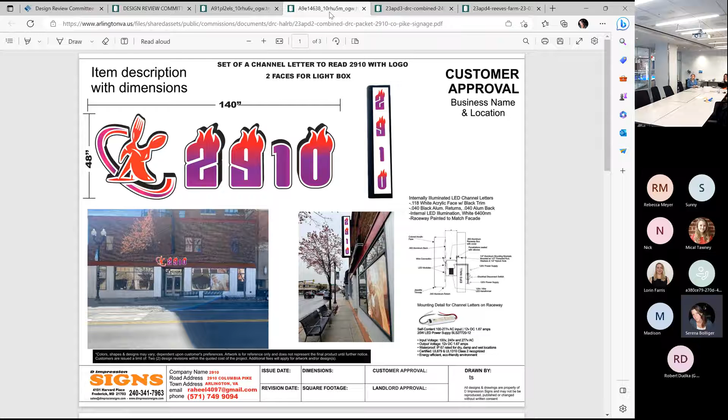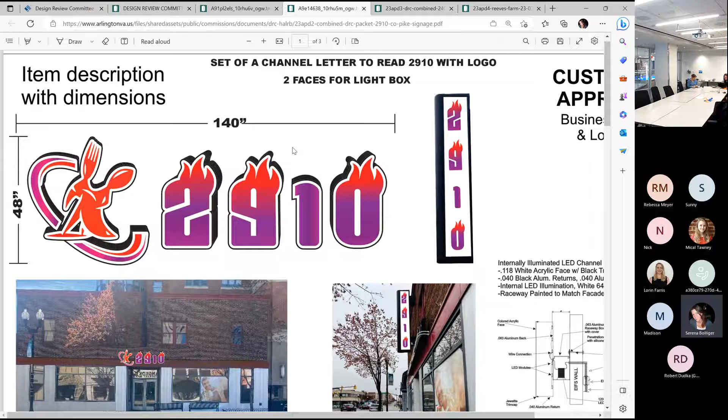The next item is an application from Mr. Khan at 2910 Columbia Pike. You reviewed his window application the last two months, and he is going to go ahead and do the windows as approved in that meeting. He has now returned for signage. He is planning to put in this blade sign and facade signage, and I included in the packet images showing that this building traditionally has a blade sign and this facade signage, and it had it also originally, back in the 90s.

So this is the design that has been submitted to us. Mr. Khan, are you on the line with us? Yes. Ah, perfect. Yes.

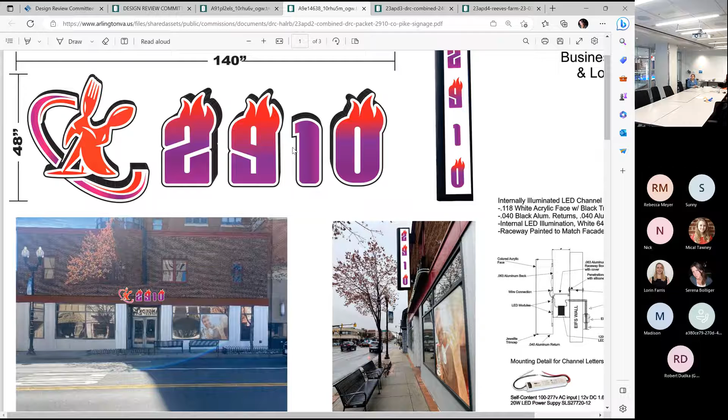Would you like to add anything? No, the only thing I wanted to add is that basically all we're doing is just changing the name that is currently there. We're not adding anything. The placement of the sign is exactly what it is currently there from the previous tenants. So basically we're just taking their sign off and putting ours in the same place. There's nothing additional that we're doing.

Any questions from the commissioners? Does anybody have comments? I have a few, but I'll wait. Well, I think we've gone over this quite a bit, except for the sign. I think it's certainly interesting. Not sure.

For 2910, the horizontal is quite readable despite the flames at the top of the numbers, but I'm not sure it reads as well on the vertical one. I mean, I can see the virtue of having it repeat, but it's not as legible.

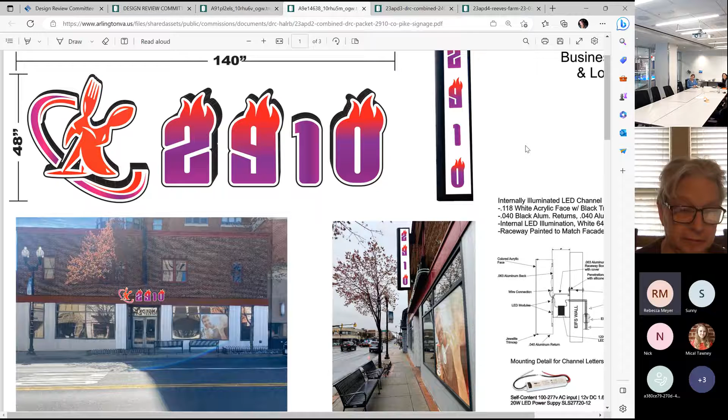Do we know, historically there's always been a linear sign. How was that anchored? I'm just wondering, because the current sign that's there now is much longer, and when we put the shorter one on, what will it look like behind it?

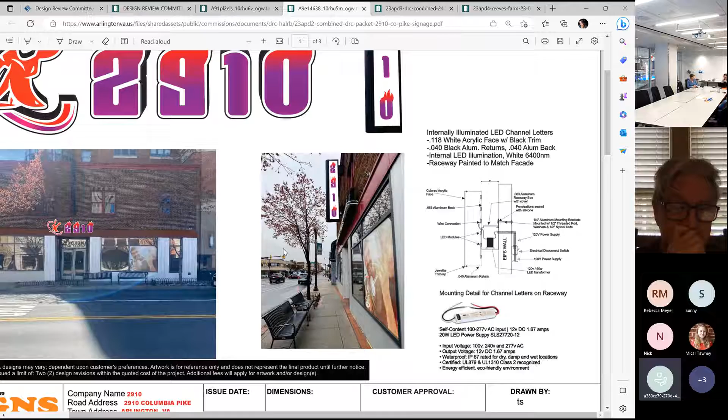Oh, I see what you mean. You're asking, since there's currently this black anchored sign, which is much longer, how much will need to be infilled, and what does the brick look like behind it?

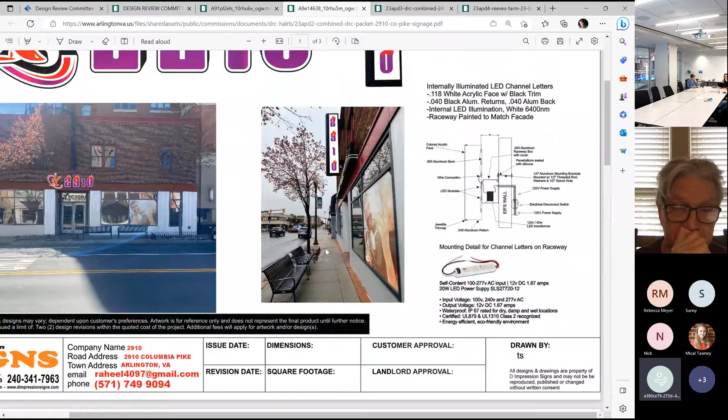Has the sign already come down, Mr. Khan? Apologize, can you repeat that again? Has the black sign that used to say P. Brennan's Irish Pub already come down? No, ma'am, we haven't touched anything yet.

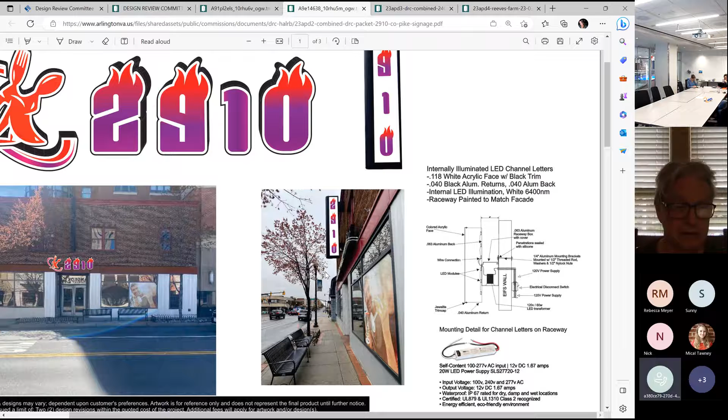Okay, so you don't know what it's going to look like behind when you take it down. You don't know how much anchoring there is or if there's going to be holes in the bricks or anything like that. So what we currently have there, the black sign that you're talking about, where it says P. Brennan's Irish Pub — I'm not talking about the vertical one, the blue one. We're talking about the horizontal one.

Yes, so that signage is pretty long, basically. So we have to actually see behind how much anchoring has been done. But my sign that I'm putting on there is much smaller, so space-wise, where we're going to put it is going to fit right into it. We're not adding additional holes to the facade, and we're not doing any extra anchoring. Whatever is already there is more than sufficient for us. Most likely, we're going to have to cover some of the holes that were put there by the Irish pub that was there before us.

Right. I guess that's my concern, is just knowing what's behind it when you remove that long sign to put on the shorter one. I'm not opposed either way, I just want to make sure that we're treating the facade appropriately once we see what's behind it.

Yes, ma'am. The only way I can do this, and the only way we can actually know, is if I take off the current sign that's already there, and I cannot touch that until I have some type of approval from you guys. So I can't just literally take off the current sign that's there. But what I do know is, when I spoke with the designer, the company that's designing the sign, is that the space that the current horizontal sign is literally a lot bigger.

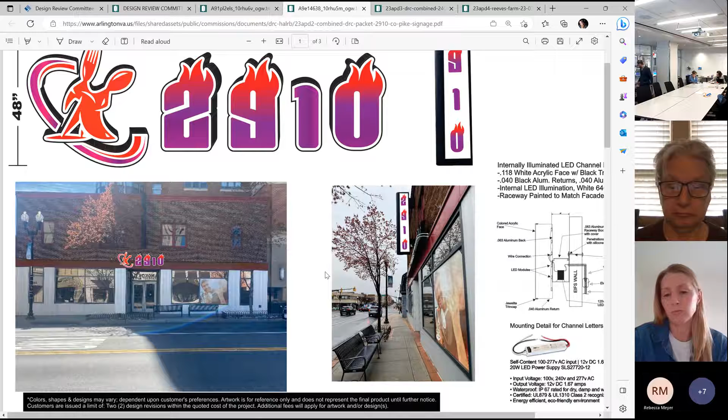Sorry, can you clarify? Maybe I'm misunderstanding. Serena, if you go to the straight-on photo of it, so you said that it's nailed to it. What is it nailed to? I guess because from your comment, it sounded like some of what is currently there is staying for your sign.

Is that correct? Okay, so the current sign that's already there, there's a lighting board on the bottom, and then they have letters on top of it, which are the neon letters. Those letters are held by a frame which is in the back of it where the light goes. So that frame in the back of the letters, you gotta have a support to hold that sign.

So they are anchored or nailed into the facade. So once we take those off, and I put my sign in the middle of it, we're using the same anchoring and location, basically in the middle. So whatever damage, or I wouldn't call it damage, but whatever holes are made on the left of it and on the right of it, those need to be filled in. And that wasn't done by, obviously I would go ahead and fix it, but that previous sign, the previous restaurant, it was approved by basically you guys.

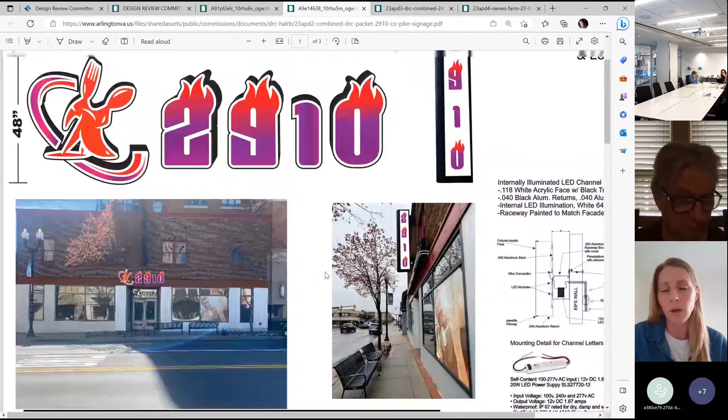Lauren, you want to? Hi everybody, Lauren Ferris. I just wanted to kind of reiterate, whenever we are dealing with signs, as Robert was saying, we would just, and it sounds like Mr. Khan is saying that once that existing sign is taken off, if existing holes or punctures can be used for the new sign, so that we're not putting any more new holes into the facade, and that repairs would be done.

And Mr. Khan, if you need to do any cleaning of the facade because it has kind of like a shadow left on the brick from the old sign, just get in contact with us and we can tell you how, because we don't want to do any power washing onto the brick.

It would totally be understood that, man. Believe me, I've been—this is probably my third time coming back, and I learned so much about this whole dealing with historical locations and properties. So I will let you guys know if anything needs to be done.

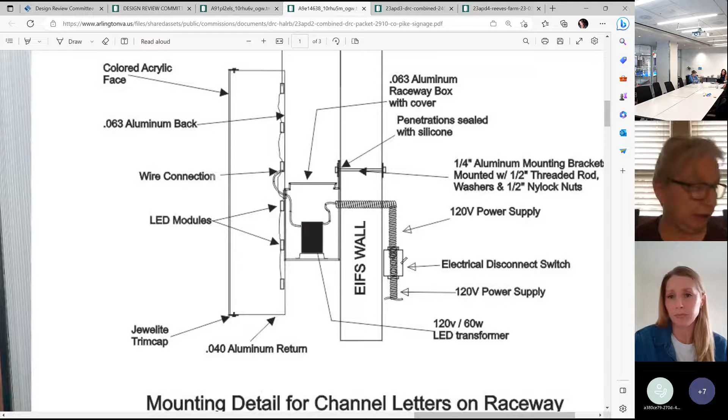Anybody else have any comments? I just have one question: is the vertical sign, the blade sign, the same height as the existing sign, or is it shorter or taller?

No, the vertical sign, all the hardware is gonna stay exactly the size it currently is. All I'm doing is changing the plexiglass, because both sides have a plexiglass with the name from the Irish pub. So that plexiglass is the only thing that's gonna be changed. All the hardware stays exactly as is. Okay, thank you, it's good to know.

Andy, do you have any comments about this? Or did you already say something? I think... other than what I said.

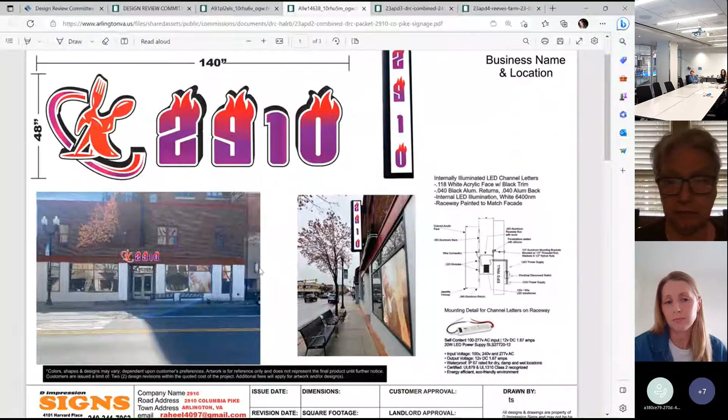I'm not sure the vertical sign letters are really that legible, especially the 2 and the 9. It's fine horizontally, but vertically I find it difficult, not extremely difficult, but difficult. I would have expected, if you wanted to put a number, to make the numbers a little more traditional, without catching fire on top. That's just my comment.

So the name of the restaurant is 2910, I gather. Yes, that is the name. Okay, well my comment is that if you look at the Irish pub sign versus the original Arlington hardware sign...

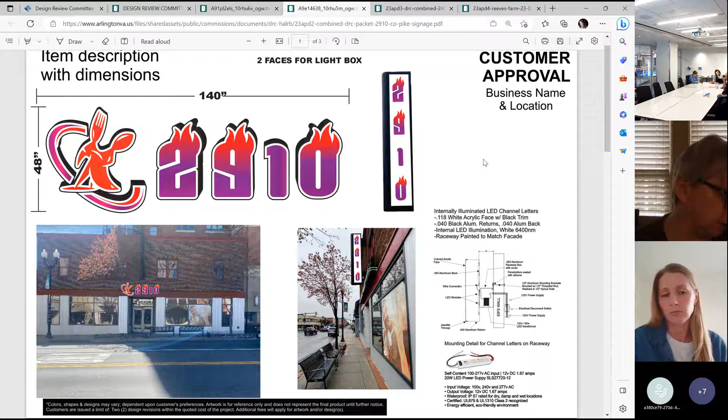They're actually both, the bottom horizontal part is not identical, but it's similar in that you have a long linear sign where the letters sit on that shelf you alluded to earlier, with those little verticals in the middle that give it the center where the blade sign goes up. Whereas yours, your horizontal sign is just a conventional sign. The shelf has disappeared, it's much shorter. It doesn't have any kind of long linear element to it, and it disturbs me because it doesn't have any of the character of the original sign.

Whereas the Irish pub, it's a modern building, they used a modern font. I understand some of this is your logo for the thing, but I feel there should be some effort to make an accommodation with your sign to the historic character. Let me finish. The historic character of the signage, because this is a really simple building and quite a lot of its character is actually the sign, quite frankly. And whereas I think the Irish pub one carried the spirit of the sign that was there before, I don't think yours does. It's completely different. It looks like a sign that could be anywhere, that doesn't have to be on this historic building.

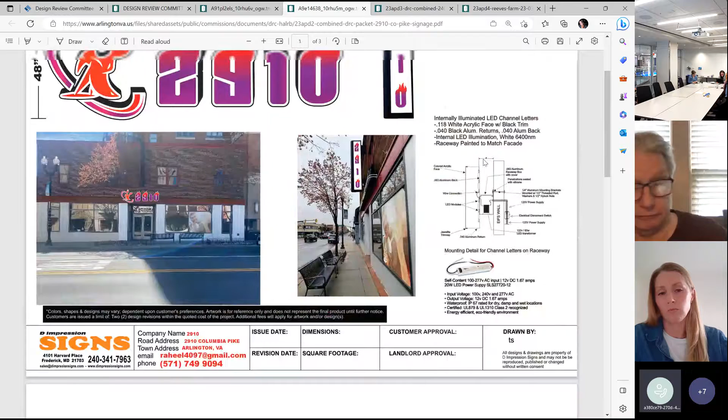Okay, as far as the font goes, Robert, we can change that, that's not a big deal at all. The font could be changed. This sign is not made yet, because again we're just waiting for the meeting and the final approval from you guys before they start producing anything. Okay, the font could be changed.

And can you look at something that's more, even if it's just lines that come out from the 2910 in both directions, give it some length? I know you were in the middle of the meeting, I don't even know if I can send you guys something. There's another logo designed by my designer which I was looking into, because I had a feeling this comment was gonna come up. So I had a logo designed which I honestly like a lot better than this current one. So I don't know, is there any way I can show it to you guys, or email it to you guys, or somehow get it over to you guys?

So you have a week from now to send me any updated drawings, and they could be considered afresh at the HALRB's meeting. So we can do that.

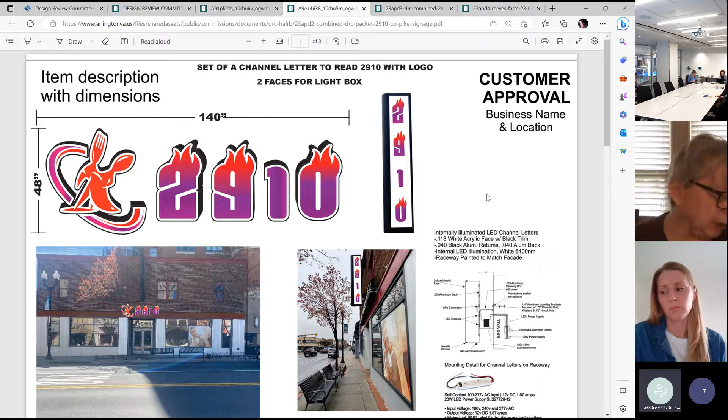And my other comment before we leave this is that you also notice the prevailing theme of both of the other two signs had a black and white sort of scheme, so you might want to think about that as well, that maybe instead of, particularly on the vertical sign, doing the letters on white, you do them on a black background. It was going to be a black background. We're going to keep it the same as we were talking about for the vertical, right? Yes, because I think with something that's black, you can still have elements of color in it, but where the predominant feel is more black and white than purple and red.

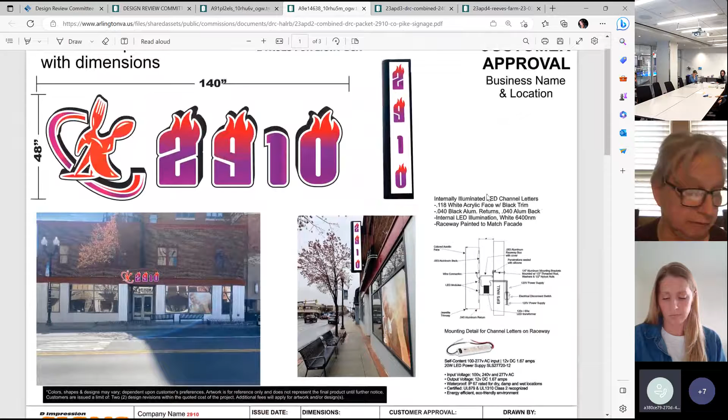So those are my comments. But I do have one thing that I would like to say: the name of the restaurant is just numbers. That's the only thing, there is no such thing as a pub or a bistro or a kitchen and bar or restaurant.

But what I can do is definitely the other design that I have is much more cleaner. Font is really good, and there's some additional lines that make the sign a lot longer. Yeah, so it's just different.

Yeah, no, I think you can do it with lines. You don't have to do it with words. But it's just something that extends it so it's more horizontal. Yes, definitely, yes. Okay, great.

Okay, Robert, can I ask for a clarifying question on the direction that you're giving? I just want to make sure, are you all trying to see if Mr. Khan can keep on the horizontal line, keep that kind of Art Deco line design that the old sign is sitting on? I just want to make sure, because right now I'm not hearing that that's something you want to see.

I personally like the idea of the shelf with the numbers on top of it. If there's any way you can incorporate that, maybe even keep the bottom part from the Brennan's Irish Pub and just put your, replace the... There's one.

So the reason we had that black board removed, because first of all it's extremely old, the hardware, and I wanted it to be removed. So we had the sign pushed down because we're still meeting the minimum requirement of the height where the sign can go. And if we push that down a little bit, that way we can have the logo and the numbers and everything could be a little bit bigger than 24 inches.

Okay, well, why don't you show us what your other option is, and we can react to that, and maybe we'll revisit this idea of the shelf then. Yes, okay, thank you. Okay, no problem, I'll get that over to you guys.

Okay, so can I confirm we're putting that on the discussion agenda for the HALRB? Yeah, if they want to do it this month, I guess so, yes. Okay, oh yes, I'll get it over to you guys, and if you guys can put me back, or I think Serena was saying the next one is on the 15th or sometime.

I gotta check the email. Yeah, when is it? The 19th? Yes, so 2 Wednesdays from now. 2 Wednesdays, okay, so the 19th is perfect.

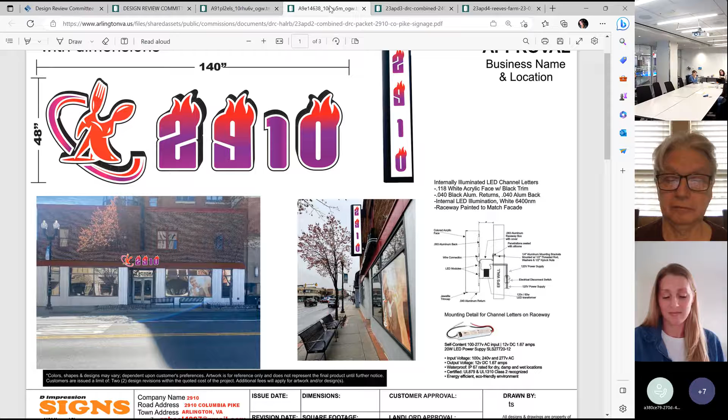Okay, so agenda item number 3. This is for another sign going into the space next to the Rappahannock Coffee space. And so this is the existing building, and here we have the sign that has been submitted. Mr. Kataria? Yes, I'm here. Perfect, nice to meet you.

So the applicant has already reduced the size of the sign for us and has resubmitted this. It used to go up into the coping, and he's been kind enough to edit it. Do you have any additional comments to make, Mr. Kataria?

Yeah, so one of the things we were kind of looking at again was if you look at the Rappahannock sign, or the sign that existed before this, I don't know if you have access to that. I can pull it up. That's fine. So that definitely goes above that green or dark gray line I know we talked about. So, and then I started looking into it. I was hearing that only the first, like, top 2 lines you should not cover, but the third line is okay. So can you elaborate on that if you have information?

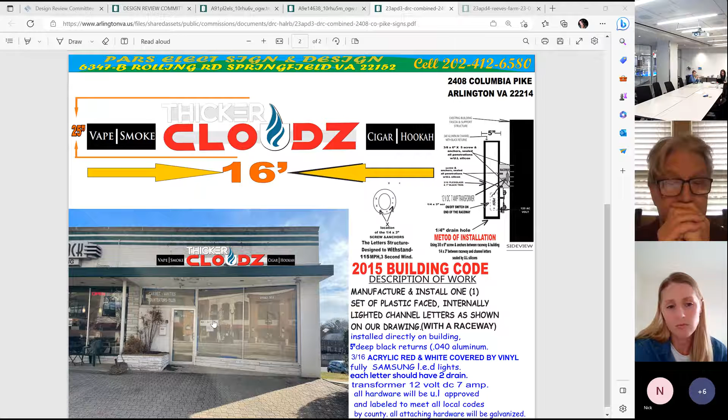What does everybody else think? I agree with you. I think the sign needs to be raised so that the smoke coming out goes up as the Rappahannock does, and cuts the lower two letters. That'll make it much more visible, because that overhang does come out a ways.

It does obscure the sign as it is now, you're right. It's not going to look like that unless you move it up. It really needs to move up a lot more. Otherwise, you'd probably see it from the street, but you wouldn't see it from street level on that side of the street.

So I don't have a real problem with it. I think the comment about echoing the green instead of black is a good point. I think it would help it blend in a lot more.

The only question I had was, I guess, will the vape smoke and cigar hookah text be readable from the sidewalk? It seems a little bit small compared to everything else, and that text seems a little bit small and kind of scrunched down. I understand you don't want to make it too large, but maybe it's a little bit too small potentially. That's my only comment there.

But Mari, I think it's actually bigger than the thing that says coffee and roasting on Rappahannock's side. We put them, I don't think it's too small. It's just, I don't know, it's about the same as the coffee and roasting. I think you'll be able to see it.

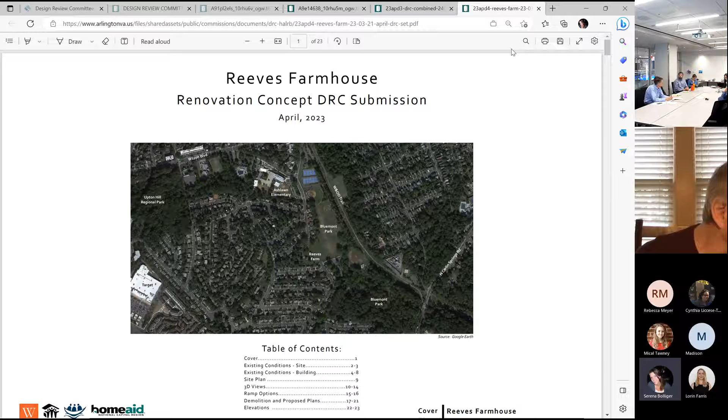Unfortunately, Kumar, you get the benefit of not seeing it on your screen. Yeah, the rendition of the package is not as good.

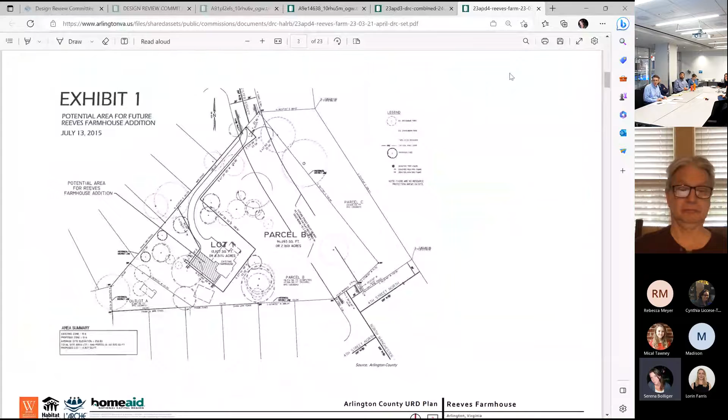So sorry, Serena, if you can, sheets 1 through 12 are no different. They just remain in the package for the full board when we get it. So if you jump to 13, please. And we always have these if we want to circle back.

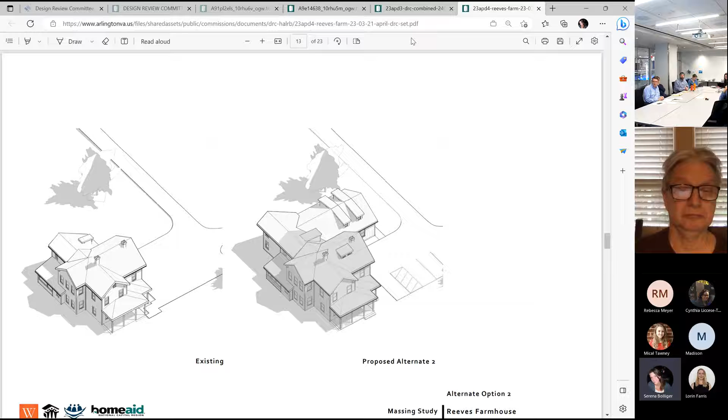So just to recap from last time, we presented 3 options: one we called baseline, and then alternate 1 and alternate 2. Alternate 2 was favored by the committee last time, and we've been proceeding to update that somewhat. In this aerial massing view, the primary difference you'll note is that we've added dormers to the addition to give it a little more texture, as was suggested.

We did look at trying to do a porch on the entry side. It's just not enough real estate there to do that, we felt, and also the fact that just behind that one window you see in the addition are bedrooms, so that's a private area on the inside as well. We didn't think it would be good to have something that was, for lack of a better term, an attractive nuisance, having people want to occupy that space directly adjacent to a bedroom.

But we did add dormers to give it a little more texture. That attic space, as we developed more detail in the interior layout of the second floor in the addition, we think will be a wonderful storage attic for operations, and we think we can get access from the second floor into that. Those aren't fake dormers; they'll be real dormers with real windows to get some light in. At least that's our intent.

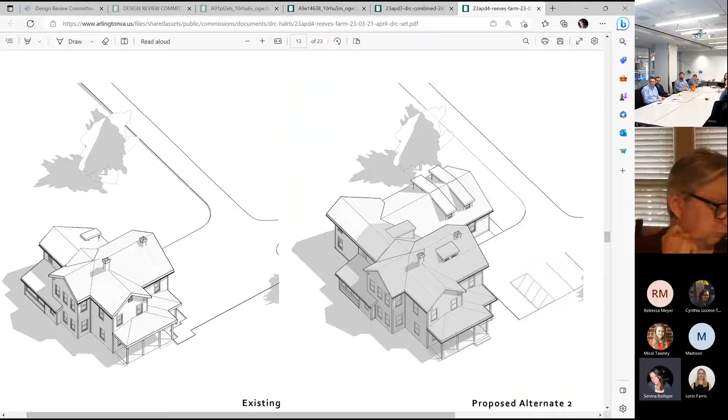So the next sheet is the down-on-the-ground massing studies. Again, lower right, you can see the same, you're seeing the dormers there. And just a reminder, we're still in a concept phase here. We haven't begun permit or construction drawings, so there will be more specific detail as we progress.

Hopefully, if we can get to the full board this month and get this concept approval, then we're going to race right into that, because based on that we want to get it done as quickly as possible.

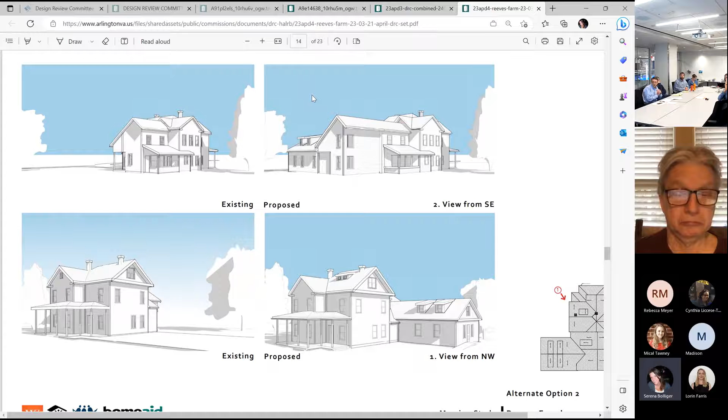The other thing I'll note on the lower right, compared to previously, is that we raised the eave of the addition up. I think previously we had the eave aligning with that intersection right at that inner corner, and we found, as we studied more, there just wasn't enough headroom in the addition. So we raised that up. We actually think that disjoining those helps a little, creating some distinction between the existing and the new. Subtle thing, but we think that's good.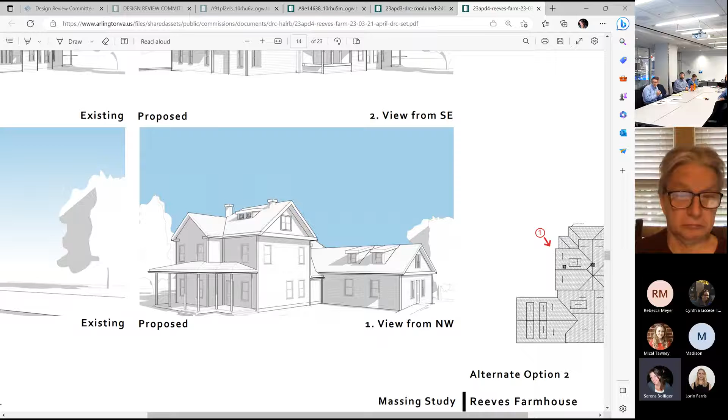We're going to show you some ramp studies that were asked for last time. That's not represented here; we're going to see that in a different view. Could we see the southeast? Sure.

So what I'll note on this, again you're seeing the dormers on the addition to the far left. What was talked about and suggested last time was trying to introduce some more prominent distinction between the addition and the original. We did study that, and we did not incorporate it.

Primarily because in order to introduce a massing change, you would basically have to drop the ridge line down, drop that whole roof structure down, which presents headroom problems on the interior. And when we studied that, from a purely visual standpoint, we didn't like it much, because you've got that gable sort of to nowhere on the taller farmhouse, then the original tenant house which drops down from that, and then if we bring our new addition and drop down again, you have this cascading effect, which we studied briefly but just didn't like visually.

We think that with this continuity of the roof line, we certainly have a corner there, an outside corner, and then we have a setback, because that's part of the URD requirement, setback 2 feet from that existing corner. So we do have a mass change in that plane, and we're hoping that this solution would be acceptable.

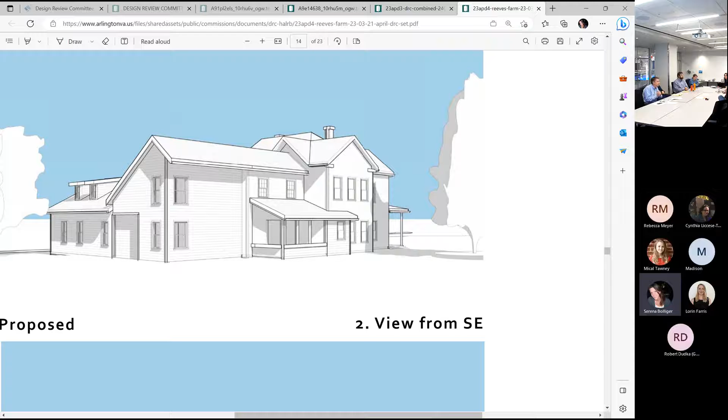Serena, if you could flip to the page, I think those are the highlights from that—these images. And then, sorry, if you go to the next one please, page 15.

These are the ramp studies. Originally we had a ramp running along the front of the porch, and the comment was that it's a visual obstruction to the nice porch as seen from a distance, and to the views out from the porch—there's also potential visual obstruction. So we have two studies here, both of which address that concern in slightly different ways.

This one—you're not seeing the context, but you can kind of see it in the upper right image—shows the parking is directly adjacent, with a couple of handicap spaces there. So this one brings you up and around with a switchback, coming in centered on that column bay of the porch at the left.

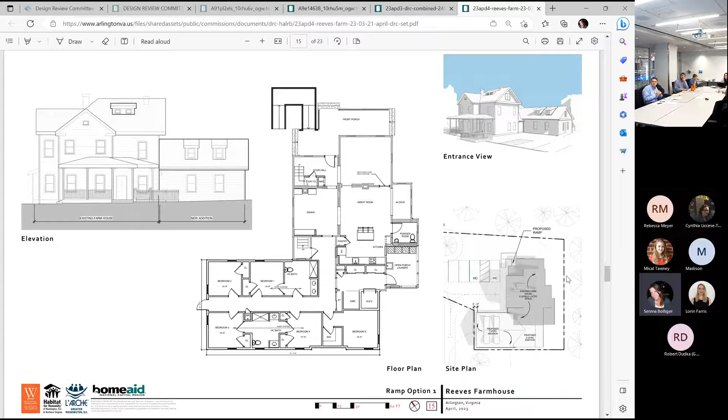The primary distinction with this compared to the other one is that it keeps those couple of risers on the left from grade clear. It maintains all three existing stairs up from grade—one on the far right, one above, and one on the far left—keeping those all intact. So it comes into the porch at a spot that doesn't disrupt the existing circulation path out to grade.

What's your height on the handrails on the porch? They'll probably be 30—well, it could be 36, or they may be 42. So it would be one of the two. I mean, residential construction code allows 36.

I'm wondering if you can't drop it more—drop it at least to the height of the window sills. That may be possible. I think you could go to 32 inches or whatever. Yeah, I don't think that's necessarily bad.

The guards between the posts, we don't think are actually required by code because the porch isn't that high. It was a desire on the operations side to keep residents from falling off. So from that perspective, study that and see if that alignment provides enough protection. The lower you make it, the easier it's going to be for somebody in a wheelchair to look over it, because you're looking down to the valley, not straight out.

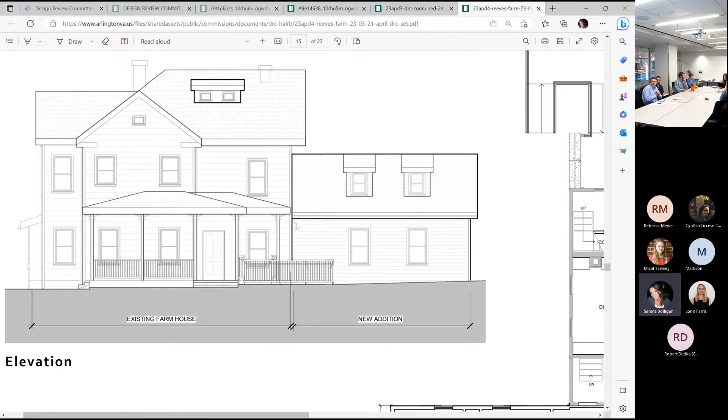You can sort of see it—sorry, it's a little thumbnail on the bottom right—but you're seeing that access in relation to the parking. There was always planned to be a sidewalk along that edge of the parking that comes down and allows for access to the porch, whether it was the ramp in the front or some other configuration.

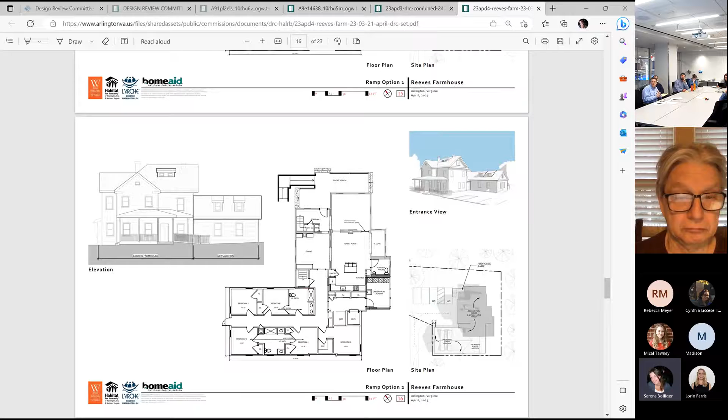So if you go to the next page, please. The second option was an option that somewhat minimizes, it does the same thing, it keeps the top stair and the left side stair access to grade intact. Still comes in the center of a post bay on the porch. But it's an L, obviously, compared to a U. It brings the access point down closer to where the parking access is, which I think ownership prefers.

The downside is that it obscures or kind of blocks that stair to grade on the right. We think it's somewhat less visually prominent from the park side, which was a comment we got. But it has the downside of kind of obscuring that stair.

Can I ask a question? Did you look at a ramp that basically comes up the side of the building? It would require extending the porch platform, the two steps on the side, out to receive the ramp, but just keeping the ramp all the way against the side of the building, so that other than extending where those two steps go up, you're pretty much not doing anything at all to the porch.

We considered it. We didn't draw it, but in our consideration of that, we felt it put the access point to the ramp too far away from the handicap parking, because you would be able to park, and then you'd have to circulate through the drive aisle aspect of the parking to get to access the ramp, because you'd need to effectively terminate it at the edge of the house before you get to the ramp platform.

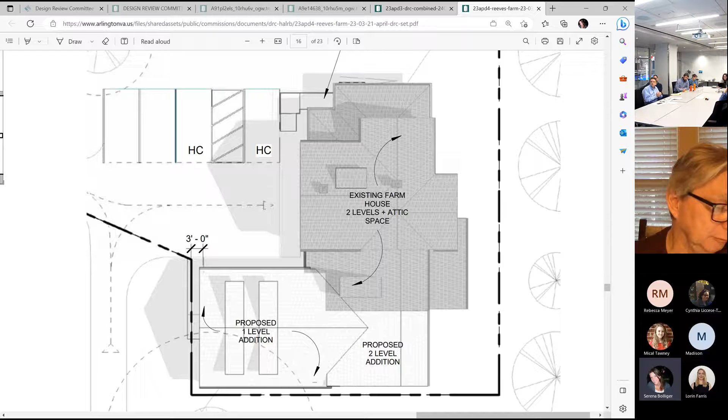Particularly if you're going to have guardrail elements, because I'm not sure I understand again why the guardrail elements are needed. What is the maximum, about 15 inches, from change of grade? It's really not very substantial. I mean, it's nowhere near what's required by code.

I can speak to that. It's really hard in a wheelchair to know that you're not going to fall off the end of something. So we have residents who will know to put their brakes on, and there'll be residents who maybe take their brakes off because they want to go and look at the edge of what's going on down in the park. And then the next thing you know, they've fallen off the edge. Okay, I understand. Well, that's all the more reason why I'm wondering about putting it on the edge of the building.

But in the grand scale of things, I think this is an important element. But I think between your two options and that option, we can work something out, I'm sure. So I don't know what everybody else on the DRC thinks about this. Please weigh in.

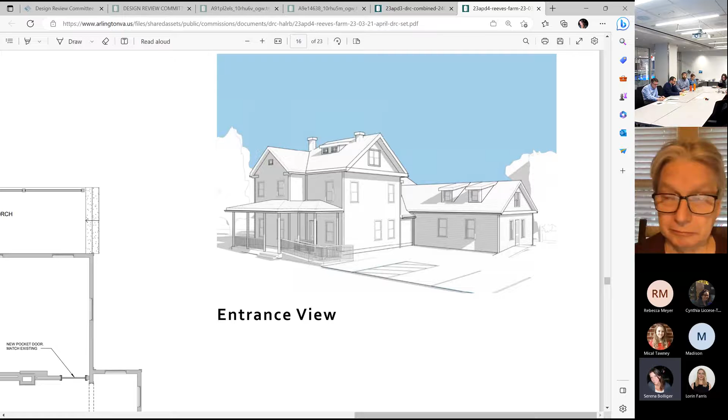I realize it's not as functional from an operational standpoint, but I kind of like the U idea, only because the U sort of gives the person descending in a wheelchair a nice park view as they leave the property. It's kind of like a nice little overlook area in a way. Maybe somebody not in a wheelchair may want to go up there and do a little overlook as well. I like that. I prefer that one just for that reason. It is more prominent, I realize that, but I like that functionality and aesthetics about it. But that's not a deal breaker, it's kind of my preference.

Anybody else, Andy? Well, the other thing I have a problem with is the dormer around the old addition on the side of the house. Can you put that dormer on the other side? Wait, Andy, let's just deal with the ramp right now. Let's just finish with the ramp.

So, have we heard from Rebecca on this? Not yet. The ramp doesn't bother me. I understand why it's shown the way it is. But aesthetically, I'm okay with it.

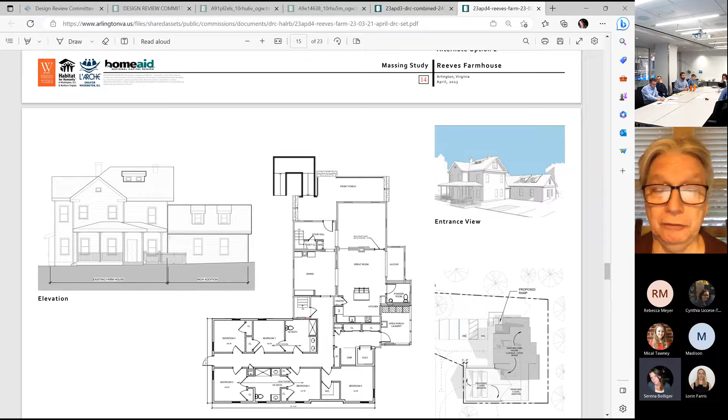It seems to me that the U-shaped one, as Omari was saying, gives you the opportunity to take a breather. You can rest at the rail there and look at the park. So it actually gives a reason why it's not a bad thing to do. The other one, although it may be a little shorter, really kind of bothers me the way it obscures the steps.

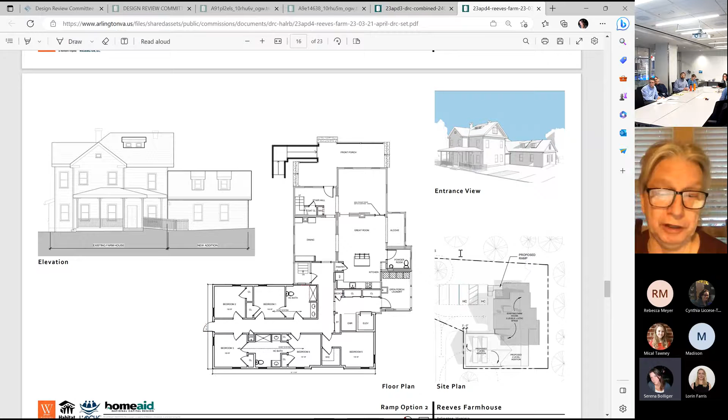I would worry that somebody coming down the steps might stumble, or if somebody wants to do the steps with a cane, it's going to make it difficult for them to maneuver between the ramp and the corner of the building. Whereas the other option leaves the steps open and free and clear if you want to use them.

And presumably there would be some sort of handrail that would assist somebody who wanted to navigate it. How many risers is that? Four risers, three risers.

I also dealt with a relative who had an artificial leg, and she insisted on doing the steps herself without a wheelchair, walking up. So I think for a lot of people, having that free and clear would be valuable.

If we're not going to consider the one along the side of the building, I'm with Omari in that I prefer the U-shaped one, even though it's a little more cumbersome and bigger relative to the porch. I think it offers its own benefits, as Omari was saying. It almost gives you a place to stop and look at the park, which is an incredibly beautiful view that everybody should benefit from. That's one of the beauties of this building — all these residents are going to have this incredible front yard.

Can I ask, will it be made out of wood or metal? It's probably wood, though the floor is probably something more durable. We're not talking about pressure-treated planks here — it needs a better floor, but the railings would likely be wood similar to the rest. So it's not poured concrete? It could be changed if it didn't suit their needs — the floor may end up being poured concrete. We haven't gotten into that level of detail yet, but we need something that's durable.

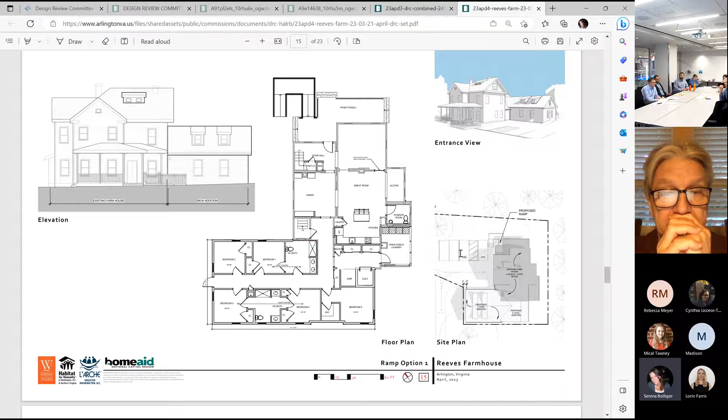Could I jump in? I guess what you're doing with the U-shaped ramp is making the ramp the furthest projecting element, and the house is basically viewed from a much lower elevation, so the ramp becomes much more prominent than the front porch. I object to it — I think the L-shaped one is the best solution, because this will be viewed from below, and that ramp projects out further than the porch. The porch was the most visible portion you see from below, from the park area up the hill. That's just my comment.

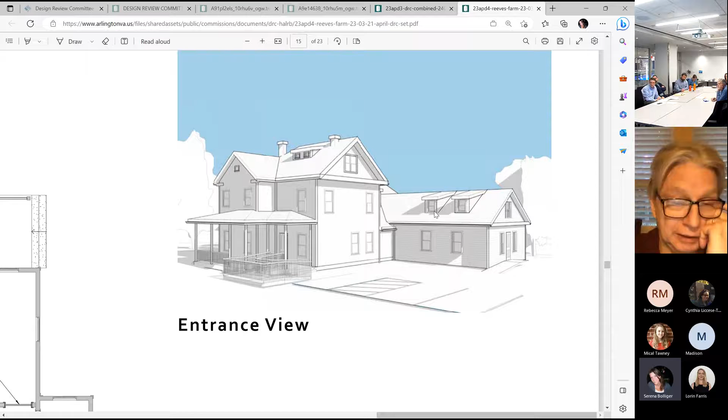I think that's a good comment, Andy, which is why I wouldn't dismiss the ramp up the side of the building, because even the L-shaped one presents something of that aspect. But you're right, you're going to see this, particularly if it has the guardrail, which I understand. So since this is the major part of it, I think you've heard our comments — maybe you can come back to us with something next time. Let's move on, since we're not going to settle this right now.

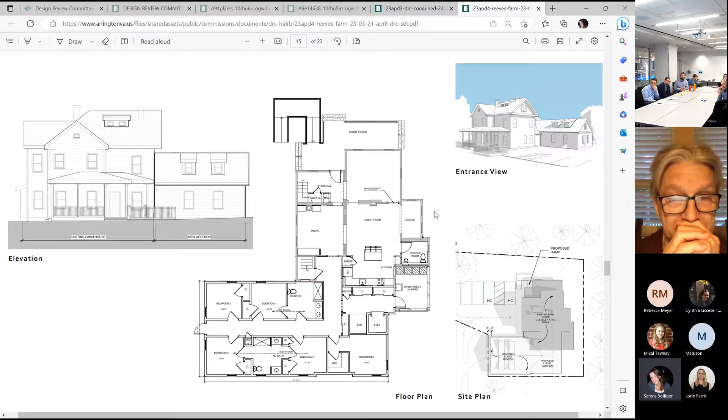Can we ask one more question? I guess what I'm wondering — I can appreciate that you get a view of the dormer on the original L addition to the house, but that dormer, because it's higher visually and larger, makes the focus go onto the roof instead of the gable front of the farmhouse. I would rather see the dormer on the other side of the roof ridge, where it doesn't compete with the original farmhouse gable. That's just my observation.

The rest of the dormers on the new building are perfectly fine, that's way back on the hill. You're talking about the dormer on the front of the farmhouse, this one. Yeah, it doesn't work on the other side.

Wasn't that required for head height as you came up the stairs? Yes, the whole purpose of that dormer is because we're introducing a new stair up to the attic, and that's the only way to get headroom there. The position of that stair only works that way, so it's not intended for the view.

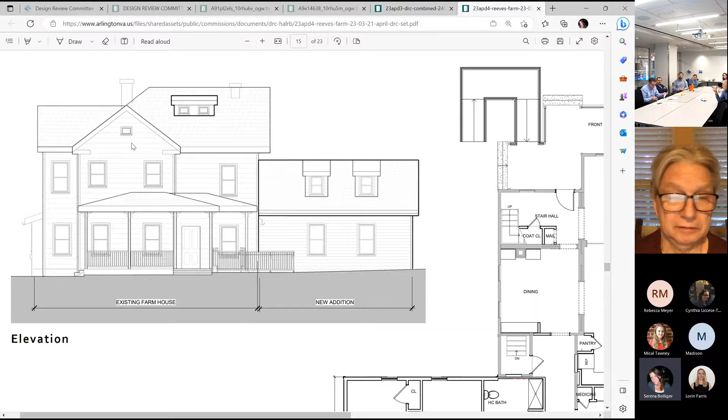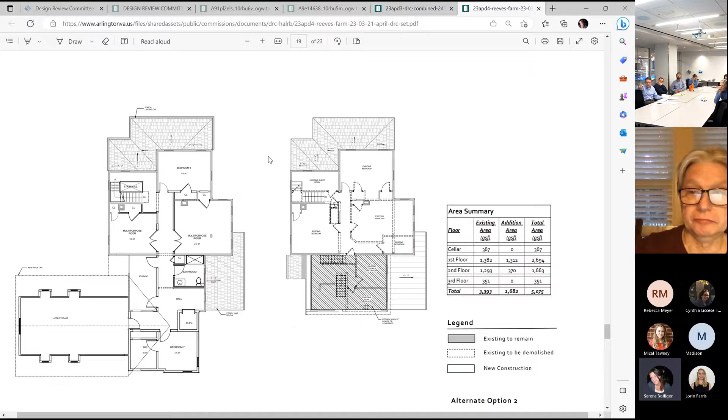Is that on a landing? No, if you go to sheet 19 to 20 - on the left is the proposed plan showing a new stair that stacks over the existing stair hall, creating that new stair from the second floor up to the attic. On the next sheet, you can see where that lands in the attic. That dashed rectangle, a little faint but you can kind of see it, is where the dormer is because that's where we need the headroom at the top of the stair.

So in order to get a stair on the back side of the ridge, there's nowhere to start it on the second floor.

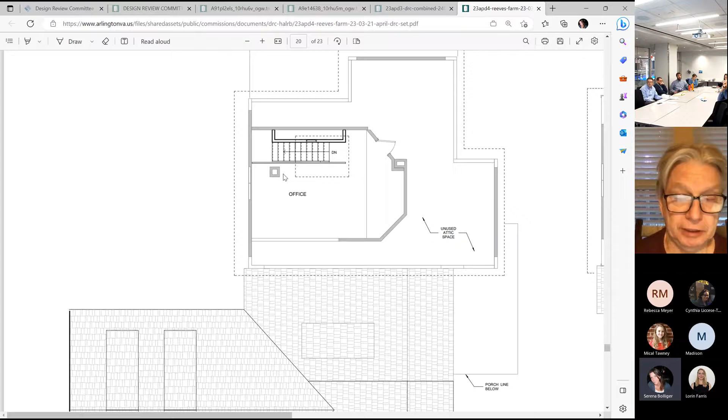Andy, I think one of the reasons we went with the shed was because we felt it was less conspicuous than a gable, which I think would be even more visually distracting, to your comment. That's why we were looking at doing it as a shed the last time we talked about this. There are probably ways that with how it's painted, it would kind of fade into the roof more. I'm sure there are ways to make it less prominent. I don't think it's hugely distracting right now, but I think it could even merge into the roof more.

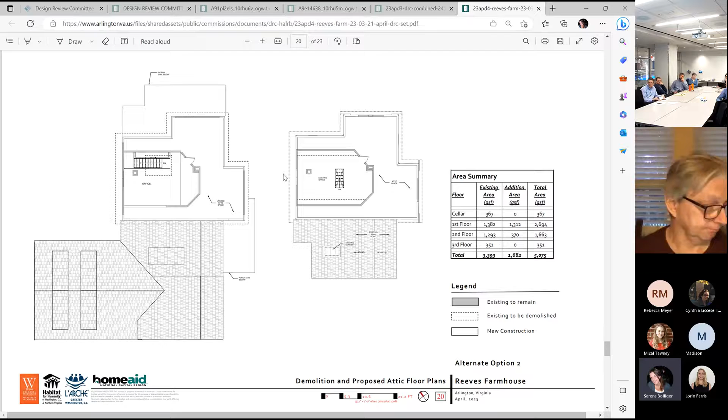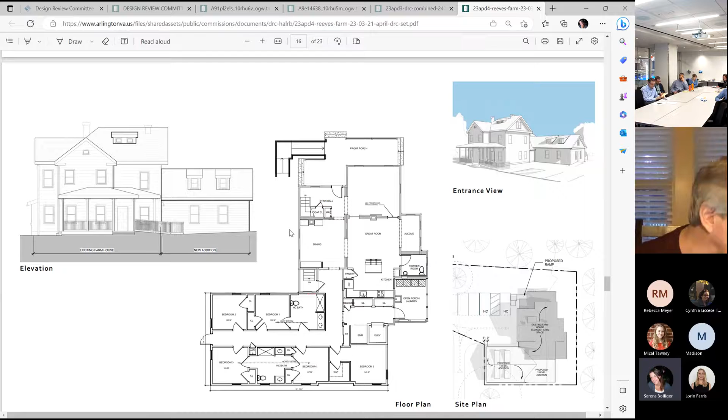Robert, did you want to talk about the addition now? Yeah, I agree that raising the eave is a good idea. I think breaking that from the adjacent roof instead of just having it extrude around is good. I still feel like it needs a little bit more articulation - I'm not sure exactly what.

The reason we had suggested the porch last time - is that an egress, that door, like a fire egress at the end? Yes, it is. So that's why you don't build there - there's very minimal space from that face of the building to the property line, it's right at 3 feet. So we can't really build an additional structure there, right at the setback.

I feel like some of this is because the perspectives don't have the detail that would give you the clapboard texture and the corner boards and all that stuff. It feels a little schematic to me, but maybe that will improve. It feels like it needs a little bit more detail, and I'm not sure exactly what that means.

I agree with you - I was hoping the porch would be part of that, but again, it's just the nature of where we're at in the process. It is schematic, so we haven't added that level of detail yet. But I agree that once we do, and that detail begins to be added to the drawings, I think it will liven things up.

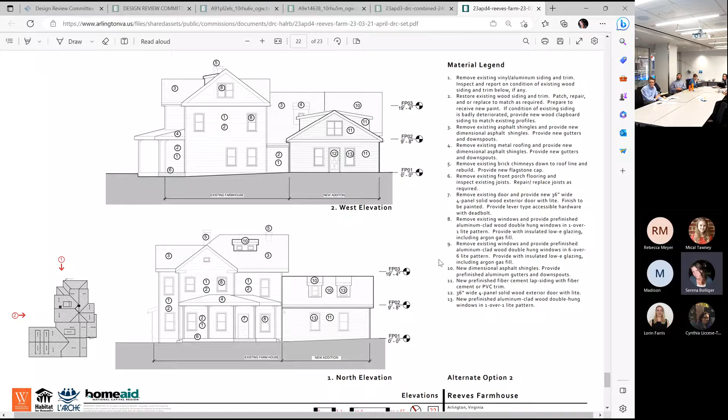These two sheets are really just to begin to give you an idea of what we're thinking in terms of materiality. It's pretty bare bones, but a first pass of the restoration plan for the exterior.

We're happy to get into as much detail as you like once you've had a chance to read through that. But again, it's broad brushes. The existing farmhouse...

Remove the existing siding, inspect, and repair as needed. There's very widespread deterioration. We have to come back and have a conversation about it.

Part of that is because in the existing open porch, encapsulated there, there is some exposed original wood siding.

It's not in particularly bad condition. We're hopeful that when we remove the aluminum siding, we'll find it generally in pretty good condition.

But is that wide lap, or is it teardrop? Because it looks like you're expecting wide lap on the main house. I don't remember.

I know that Lauren, you may have a comment about this too. I know that the supervisor for our program was a little sad to see the comment about the front door.

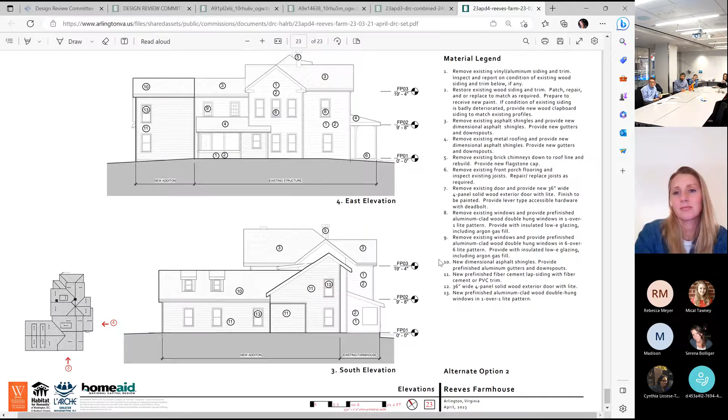Oh, Cynthia, would you like to? Yeah, I'm here. Hi, good evening, everyone.

Thank you for mentioning the door. I understand the need to make the main entrance accessible, but was wondering if you thought through any alternatives.

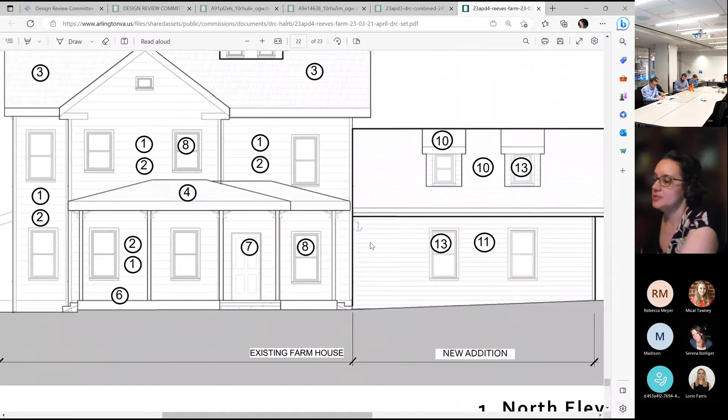So that that door could perhaps be repurposed elsewhere in the house. I was looking desperately for photos that I feel like I probably took like 20 years ago, but I can't find them anymore.

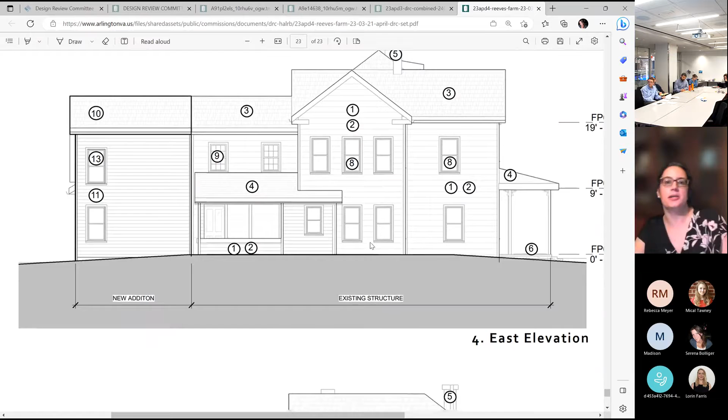The best that I could find was in the original 2004 Milner report. There was a drawing, an elevation drawing, that showed a rough detail of what that original door opening was.

So I just wanted to pose the question again. I understand the need to take it out and replace it, but was wondering—

because it's one of the more interesting exterior features of the property—if there was a way to perhaps reuse it elsewhere on the site. So I wanted to pose that question.

I think the short answer is yes. We can find a home for it. Okay, thank you for being receptive to that.

I think it's really important to convey how much we want the house to tell the story of what comes before, as much as we will tell the story of what goes next. We want people to engage with the home and know its history.

Exactly. So yeah, we're very sympathetic and empathetic to wanting to highlight the history as best we can. Yeah, thank you, we appreciate that.

The door isn't going to be the most elaborate front door you've all seen, but it was quite an elaborate feature for the time period of this house when it would have been installed. So finding another place for it within the home for another purpose, we would really appreciate that.

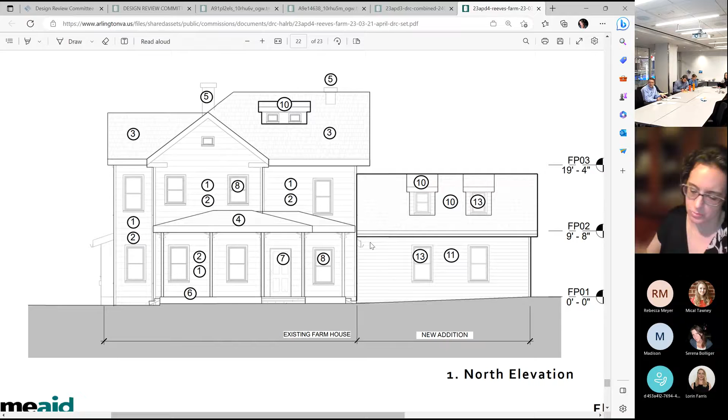Lorin, did you have something additional? You had your hand up. I had it up, but Cynthia, yeah, you got it with the doors. That's good.

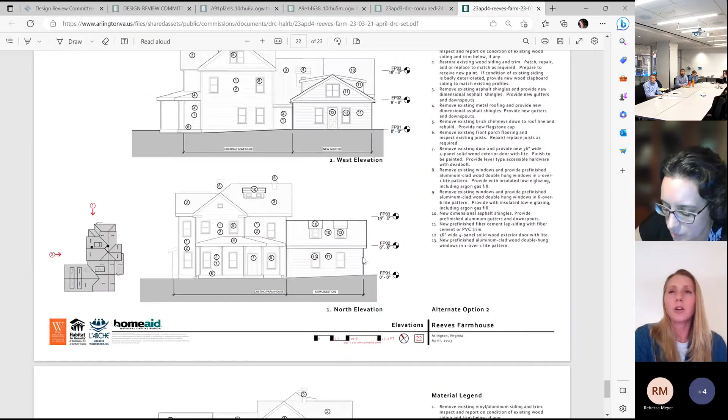I did have one question though—I just want to ask about the parking. I'm curious to know, since you're expanding the parking surface area a bit on the site, the requirement for the spaces you need for the amount of people living there.

Well, I'll defer to Luke on that. The zoning requirement is probably two spaces because we'll be under single family zone—eight or less, I think, is the standard. A group home would be—

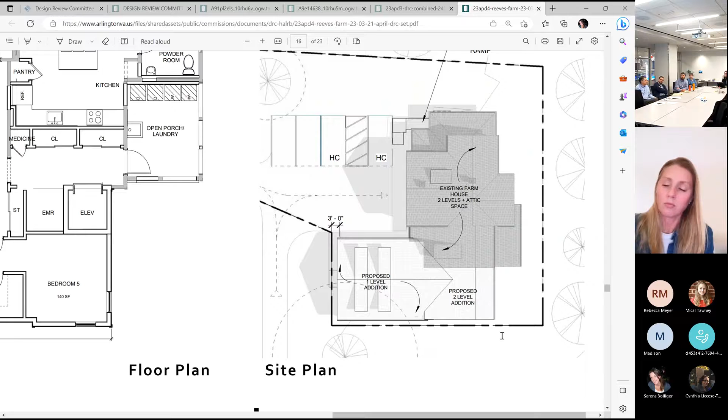on the usage side, I'll defer. Yeah, so we want to ensure that we can park people who live in the home, around the home, at the home, and have the ability to be picked up and go to work.

Often that's a metro access style vehicle. And so for that to be able to get to the top of the hill, pick up people, and then leave—there's space at the top of the hill, but around in the parking pad needs to be sizable enough for that to happen without—

accidents, and recognizing just the skillfulness of people being able to reverse. That's a big priority for us.

When there's weather or other interruptions to business operations, we want to make sure people get to the top of the hill to get away as necessary. So having more space in the parking pad will enable that to happen.

Okay, that's good to know. Thank you.

Cynthia? Thanks, Serena. I just had two more quick questions. I don't mean to take over the meeting, Robert. I want to make sure DRC members have time to comment.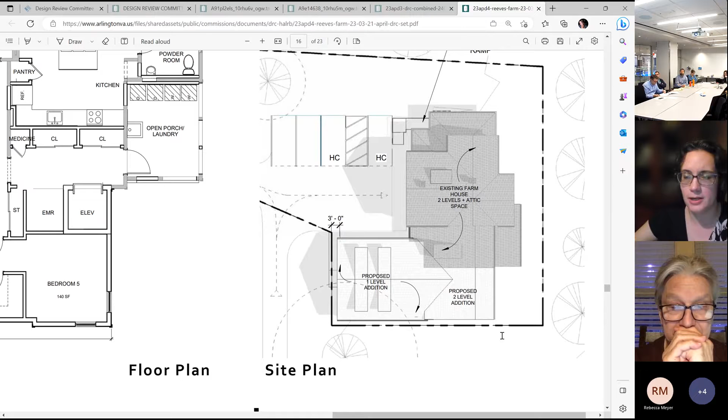I think this is more for Scott. I just wanted to clarify on a few of the pages in the plan set. On the addition on the wing, the gable wing, it looked like one rendering had one dormer and another had two dormers. So I wanted to confirm which is your preference. Is it to have it with the two dormers? Yes, yes. Okay.

And then my other question, this is merely out of curiosity because the HALRB does not have purview over color, but I wanted to raise it because I thought that might be a way to further differentiate the old and new construction on the rear. Have you thought about color scheme? Are you planning to keep the traditional white, or mixing it up with a different color palette?

I think we're going to go with red, fiery red. You can do whatever color you want. Short answer is no, we just haven't gotten there yet. We know color's a can of worms, even if you don't have purview. So no, we haven't even gotten there.

Okay, I was just curious since we're starting to talk more about details. Okay, that was all that I had, Robert. Thank you.

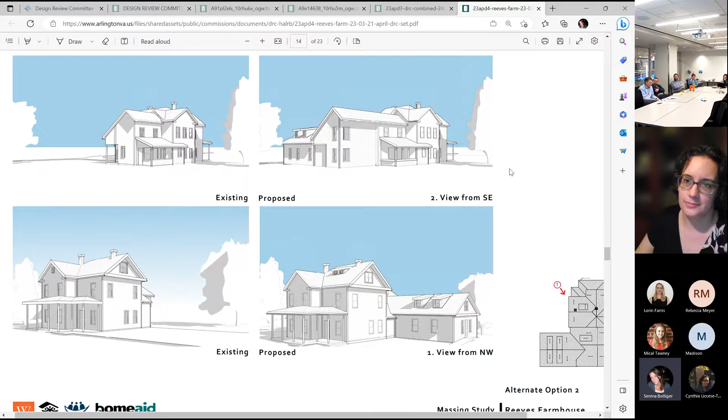Robert, do you want to go back to the comments that you were making? You might be frozen again. Okay. Yeah, we lost you again, Robert. Well, are there any other particular elements you want to draw people's attention to? No, I think it's covered.

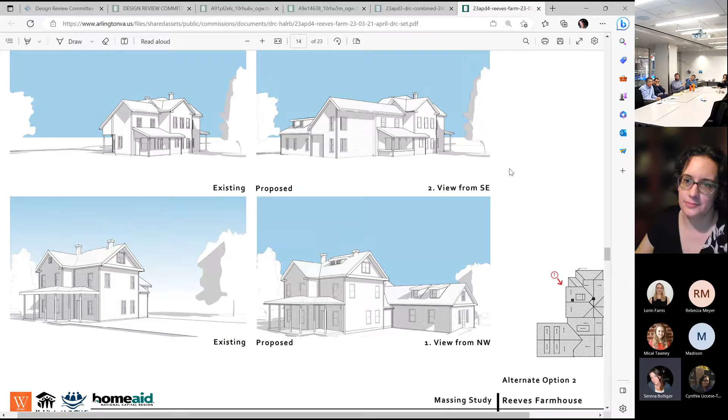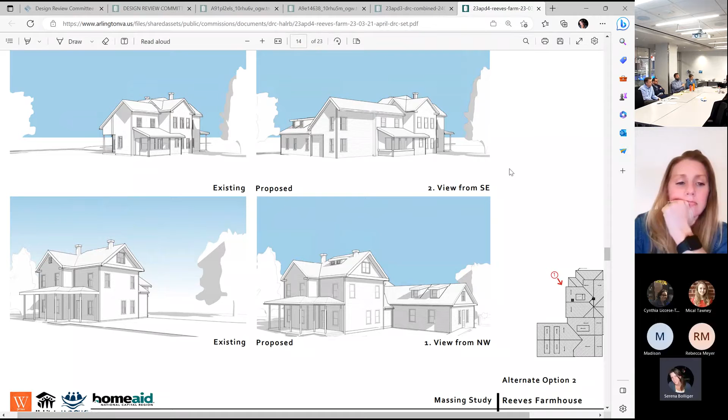I guess the question I would have, up on the screen there again, upper right: based on what we've discussed, are members okay with not having a physical distinction between the addition and the existing? I think so. Yeah, I think you do that sort of break in the plane, face to face. I think it makes sense. It would be sort of a mama bear, papa bear, and a baby bear situation.

Yeah, so I appreciate that. The only thing I still wonder about, there's no windows in between those two windows on the left side of the existing. It's a little bit blank. I understand the reason why. I'm not sure, maybe it's too cute, but I'd have to do something like a fake window there. The blankness bothers me a bit, but it's not my favorite part of the house, I'll put it that way. But I understand it, maybe program-wise there's something to put there. Just anything you guys can think of as you're going.

Sure, and I think we could add a second window toward the end. At the end of the day though, when you've got a decent size but not huge bedroom with a lot of windows, it can be very hard to furnish. Yeah, you end up with just furniture up against the window. Right, that's sort of the consideration for how we landed at what you're seeing there, consideration for furniturability.

I think, Serena, you had mentioned last time about maybe doing fake closed shutters or something like that. We thought about that, but there aren't any shutters on the house, so that didn't make sense to us. Mysterious, but it could be like the Winchester House, just shutters to no one.

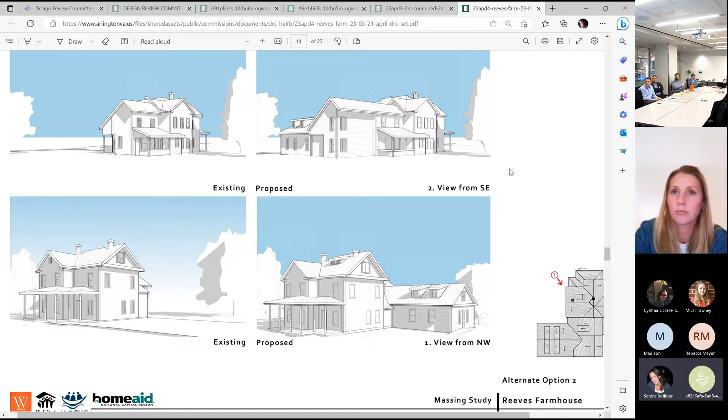Serena, can you hear me? This is Robert. Yes, we can. Welcome back, I'm on the phone. My charger died, and so my computer just clunked out. I can hear you, and I have the drawings up on my iPad, which I can't sign in on. I can hear you, and if you just say what drawing is up on the screen, I can follow along here, no problem.

So, page 14 right now. I was also going to ask, given that blank wall, I assume there's going to have to be at least one, if not two, elevators or lifts in the space. Will those be central, or obviously you can't have windows against them? No, yeah, that is why that stretches in length, that's where the elevator is. Yes.

Well, like I said, we can look at maybe adding a second window in the bedroom. But I'm just curious what would distinguish the addition out the back.

The roof a little bit more, is to just change the end of it instead of being a gable. Put a hip on it, or a clipped gable, whichever. That would kind of distinguish it. It's just a thought. It would make that a little bit more different and break some of the long expanse you've got there, or that long ridge, into a much shorter ridge.

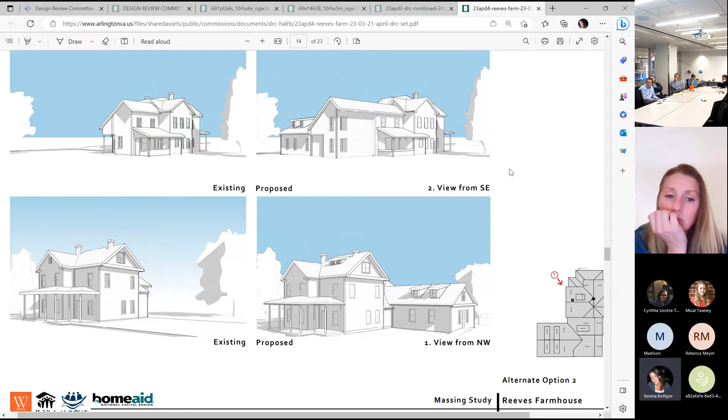You following? I do. I guess my hesitation is that there isn't that form here, I guess on the porch there's a hip. I was going to say there isn't a hip form here, but I guess there is on the porch. Part of what we were trying to do with that end is to really mimic the end elevation that exists today and just kind of extrude it out, using that same proportion. That's what that recess is all about, the ghosted open porch. One thing we could do...

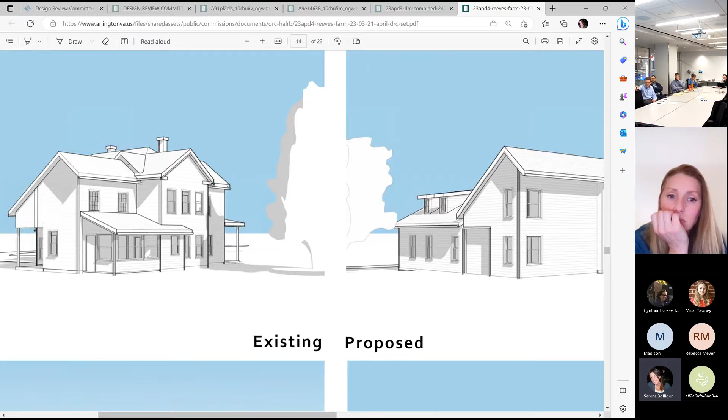I mean, right now—I'm sorry, Serena, if you drag over and zoom in on the upper right. I really hope I'm not giving someone a seizure, but this is just how my computer's doing. We have continued the eave, and given that 3-foot setback from that existing corner, that means we've got a deeper eave on the addition.

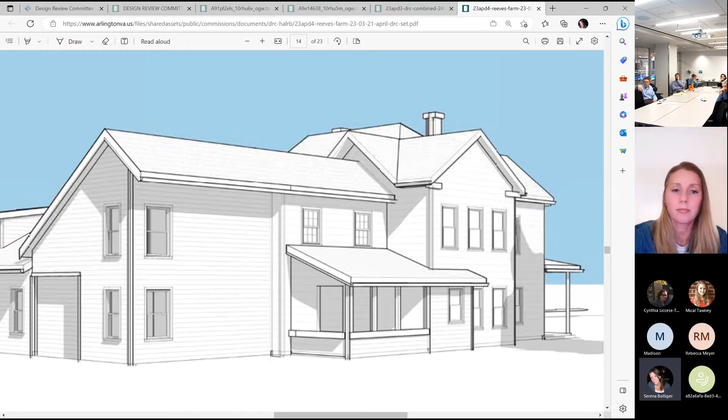We could do that. We could pull that eave back to have the same relationship of eave to face of building, which would give you a break in the eave line. I think that might be a good idea. And then you drop a gutter downspout there, and that would help reinforce that corner. That's certainly easy to do. It would, again, be subtle, but it would be noticeable.

Hey everybody, it's Lauren. I just wanted to ask, if I'm sensing that maybe the DRC has kind of finished with some of their comments, unless anybody wants to point out anything else that they'd like to. No, I think we've covered it.

Okay, then my next question for the DRC is, right now what we've been envisioning for this project is to see when it's ready to be presented to the full HALRB so that they can start getting familiar with the project and see how comfortable they are with the massing, the placement, the roof shape, more of the bigger items than down to the details that we will eventually get down to, such as materials, and that will also determine things like how the condition of the material is underneath the siding and whatnot. But I wanted to see how people feel about the HALRB being able to see this during the April meeting.

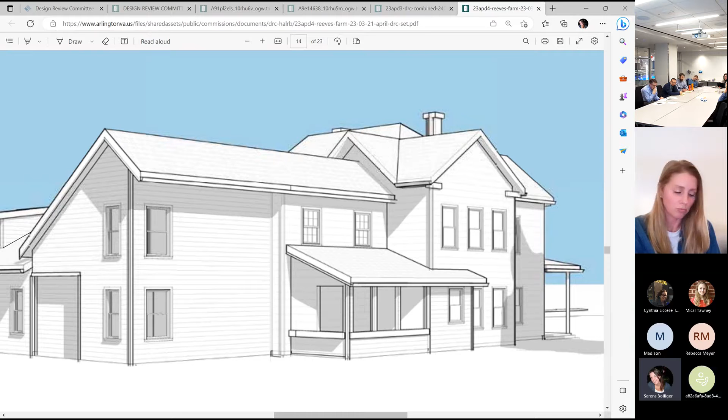addition—look at the change that was just proposed about notching the eave on the back. Yep. I would, even if you don't like it, if you could come with a proposal to do the ramp on the side of the building, I think you're going to get the same questions from the full board. Particularly, I think there is a board member who's very, very interested in this project, and he's very familiar with it. So I'm sure he will ask questions in regard to that.

I think having some proposal where it is along the edge of the building and completely leaves the porch alone, I think will be necessary, so that we're not talking about it in the abstract. We can actually see what the issues are with it. But yeah, I mean, does everybody else agree that we're ready to go to the full board with those changes?

And just so everybody knows, this would be like a preliminary COA, just a progress check. I mean, it's a progress check, but Mike, you can probably refresh my memory on what the LOI states, that we need to at least get a partial conditional COA that things are going in the right direction. Then once we get closer to the idea of conveyance from the county board to Habitat, you would need to have a finalized COA.

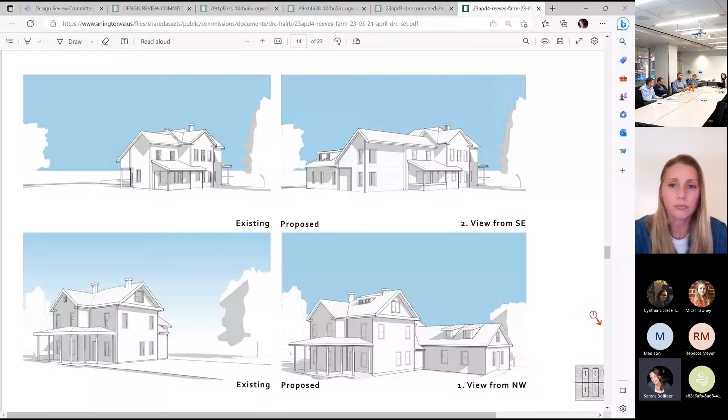Right, yeah, there's certain benchmarks specified in the letter of intent, and having that conditional COA gives us sort of the go-ahead to add more detail, answer some of the questions, and do more of our due diligence that will clear out some of these path dependencies, which will help us get to a full certificate of appropriateness.

Which is necessary for us to get to the conveyance of the property, which would allow us to actually do work. And just so everybody knows, as more details come, Habitat can continue coming back to the HALRB. It's just that this is kind of the first step we need to get through to get to the next.

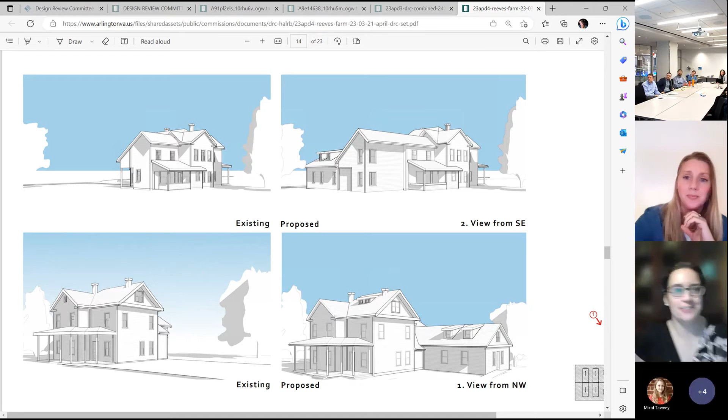Okay. Cynthia. Thank you. So this is very exciting, we're getting closer everybody. So I wanted to make one suggestion to help perhaps keep the next conversation with the full board very focused on what DRC has been reviewing.

I think it's staff's advice that when you're compiling the submission packet for the full HALRB later this month, to really focus on this option—what are we calling this, the second option? I forget what it was originally called last month, but the one we've been discussing for the past two months.

I think it would be really helpful to just have them hone in on the DRC's preference point. I think it would be okay to have the other drawings, the other iterations of how you all got to this point, kind of waiting in the wings, ready in case people want to understand the evolution of how we got here.

But I think this would really help focus the conversation if they just had this one design to put their attention to. So I leave that up to you, Scott and Mike and others on the team to think through that advice. I want to make sure we don't go down a rabbit hole of many different iterations, because there's still lots of details for them to understand with this preferred proposal. Sure, yeah, that's easy enough.

And Cynthia, do you suggest having a separate PDF that could be pulled up if needed, or just have an appendix and put it all to the back of the same document? Good question. I think maybe just have it separately and then pull it up if needed. There's definitely enough to talk about with this preferred iteration, but depending on where the conversation goes, at least we would have that other material handy.

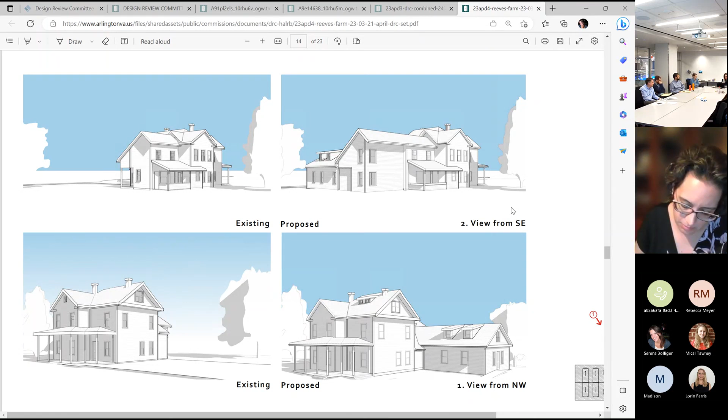All right, goodbye everyone. I'm going to sign out. Yes, good night, good night everybody. In a few weeks—right now we have until this time next Wednesday to get it done.